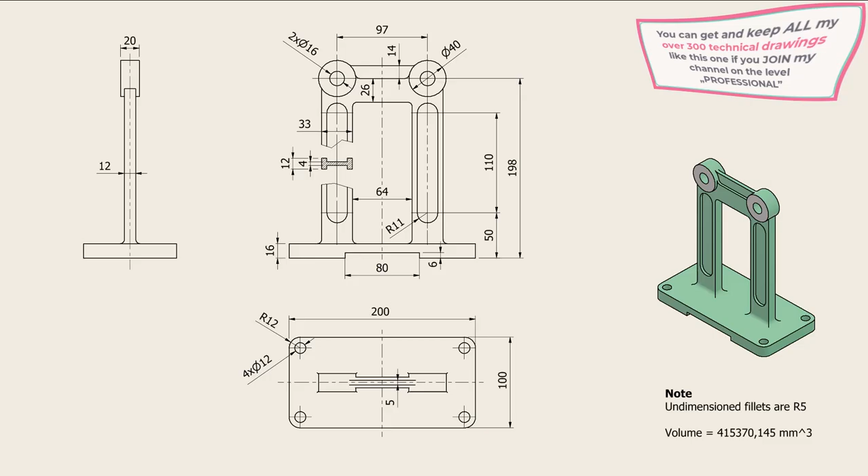Hi my friends, today we model this part, steel cast, with the drawing and dimensions as you can see. It is not a difficult model, so let's start with creating this base plate, then other features.

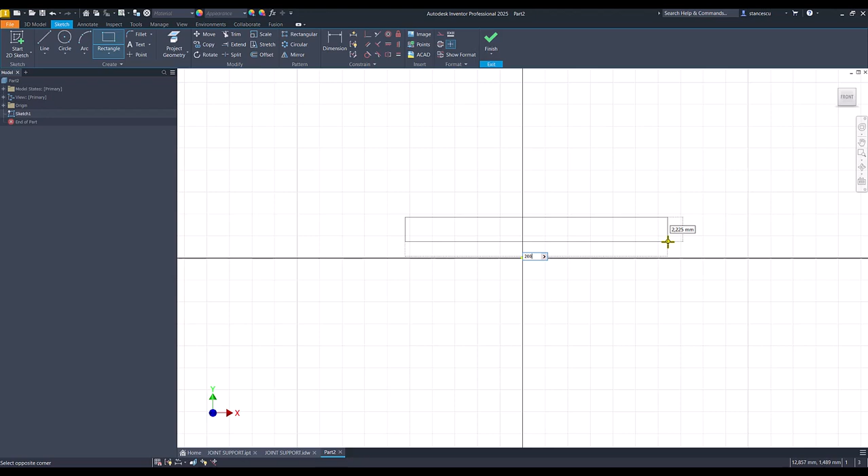New standard, millimeters, IPT. XY plane, and we draw a rectangle. Dimensions are 200 tab 16. This midpoint is placed on the center point.

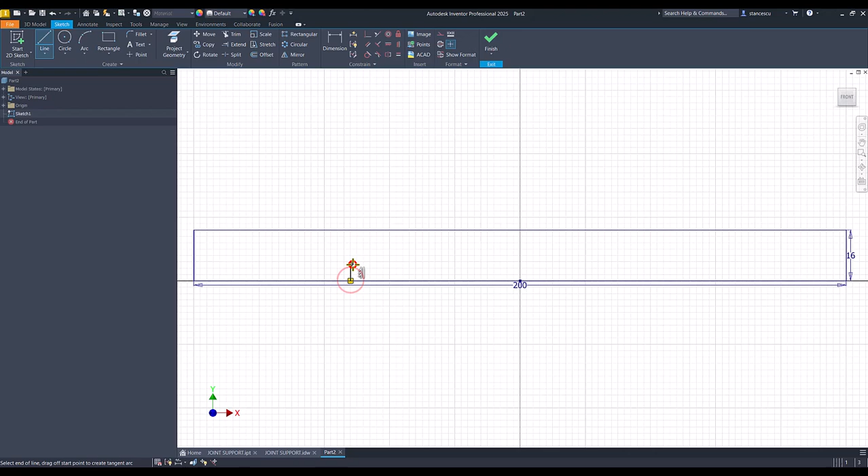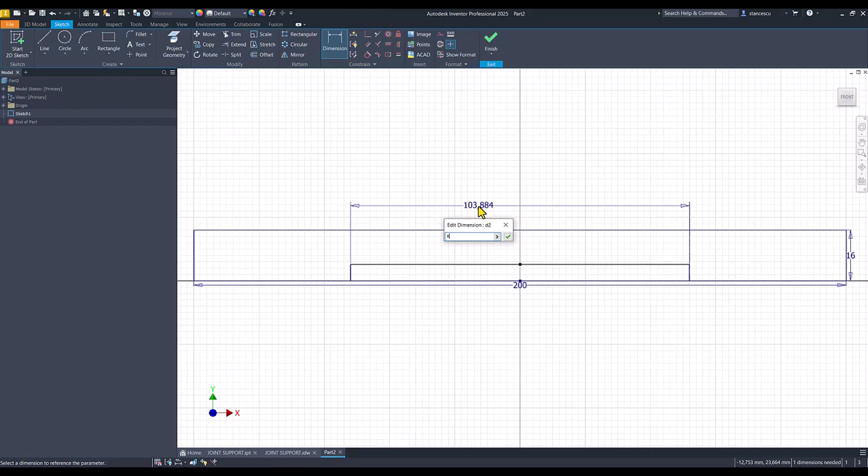Then I draw a few lines. This midpoint is on the same vertical with this, and the dimension is 80. Finish sketch, extrude.

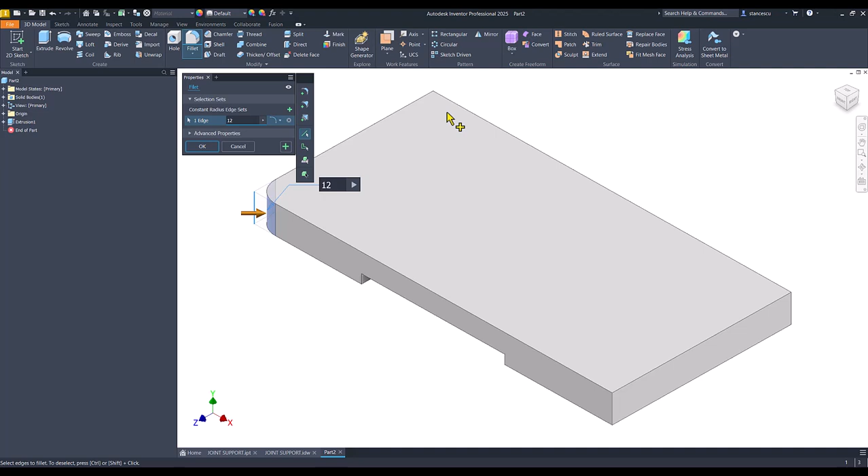This must be extruded symmetrical 100. Now I apply fillets of radius 12 on each corner.

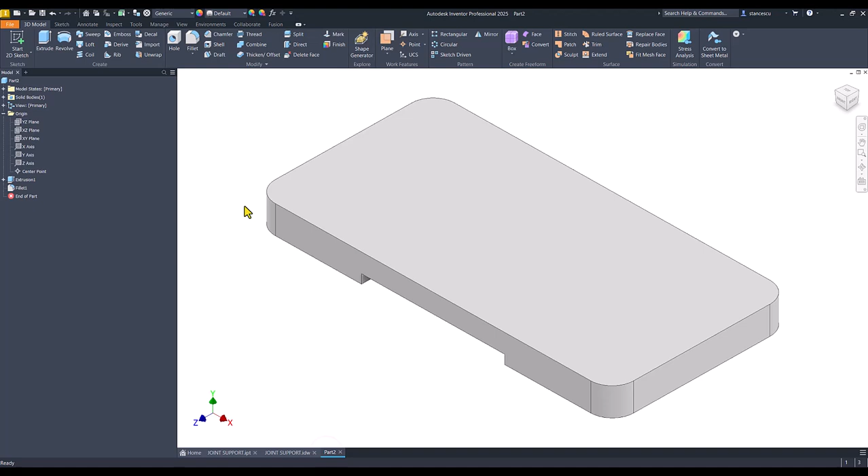Then we create this rectangle in rectangle with dimensions 198 minus 16, 33, 64, 26, in the plane XY.

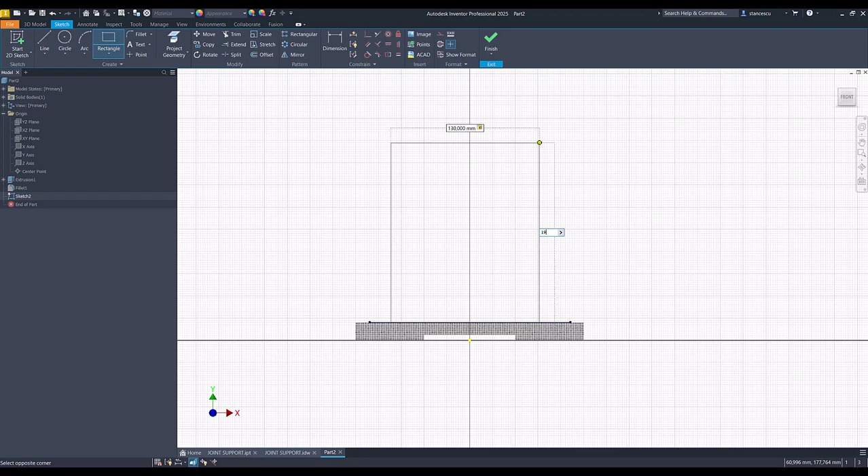F7, rectangle. This dimension is 64 plus twice 33, tab 198 minus 16.

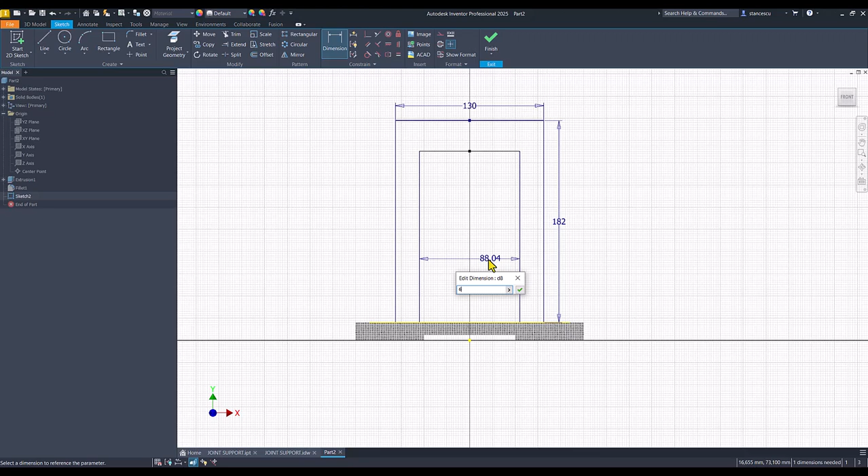The other rectangle is placed symmetrical, so I select this point to be aligned with this point, and this point to be aligned with this on vertical. This is 64, and this is 27.

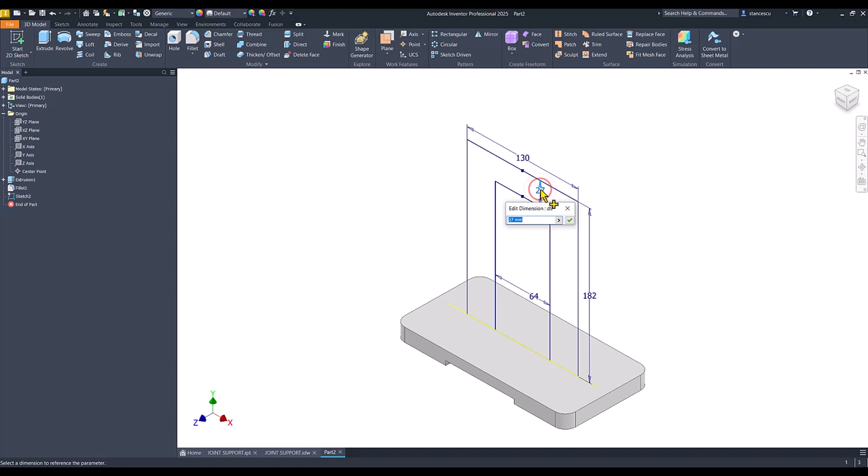Good. This frame is 12, thickness is 12. Oh, 26, not 27. 26, you see, I didn't open the sketch. This is a good lesson.

Extrude this symmetrical on 12.

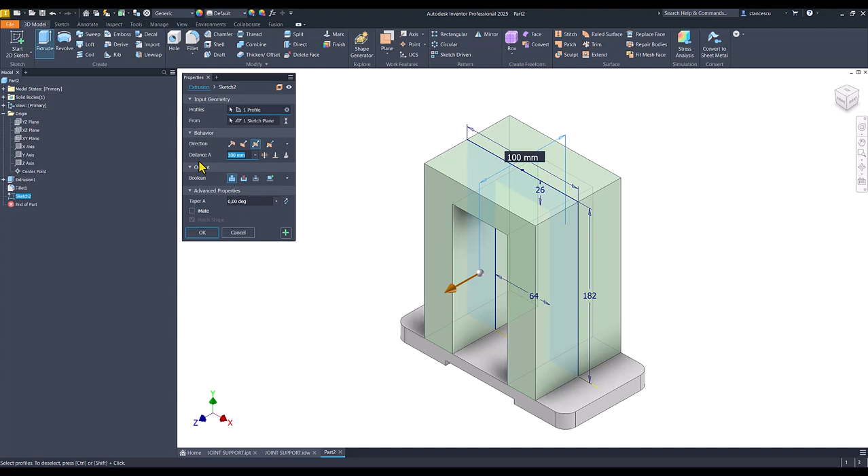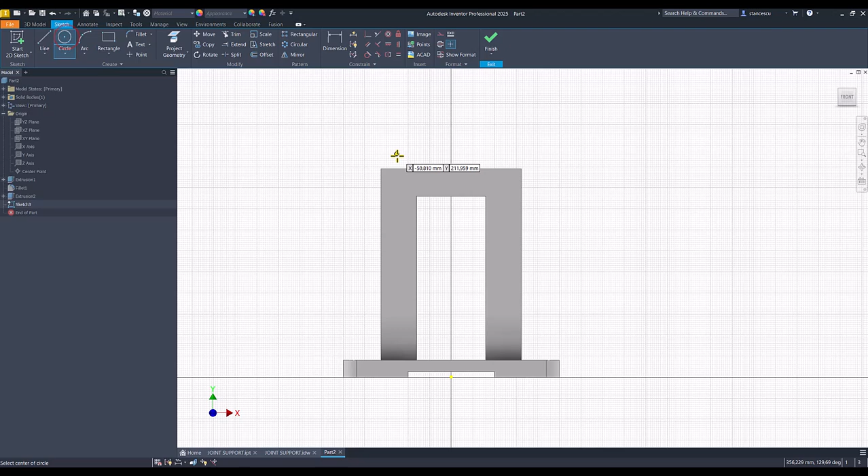Okay, we use again XY plane because we want to place these cylinders with dimensions 40, diameter 40, thickness of 20, distance of 97, placed on this horizontal. I create a circle placed here, diameter of 40, and distance from the center point of 97 divided by 2.

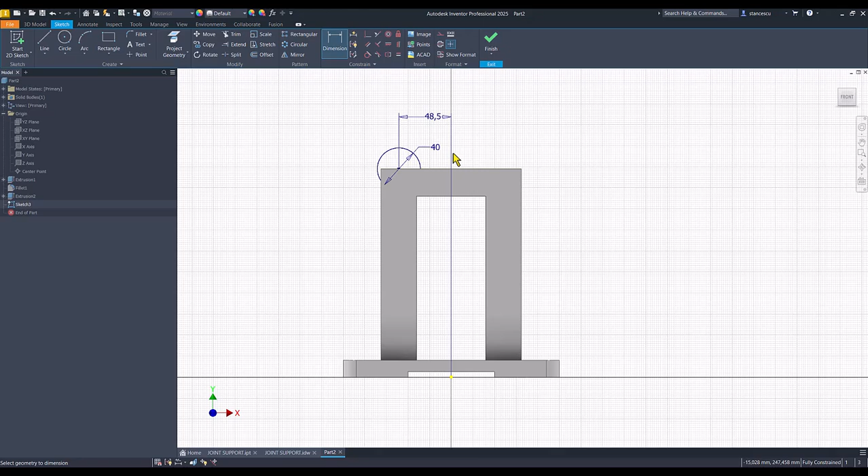Now we have a fully constrained sketch. Extrude, symmetrical on 20.

Okay, next is this slot. 110, placed at 50 millimeters from the base and radius 11.

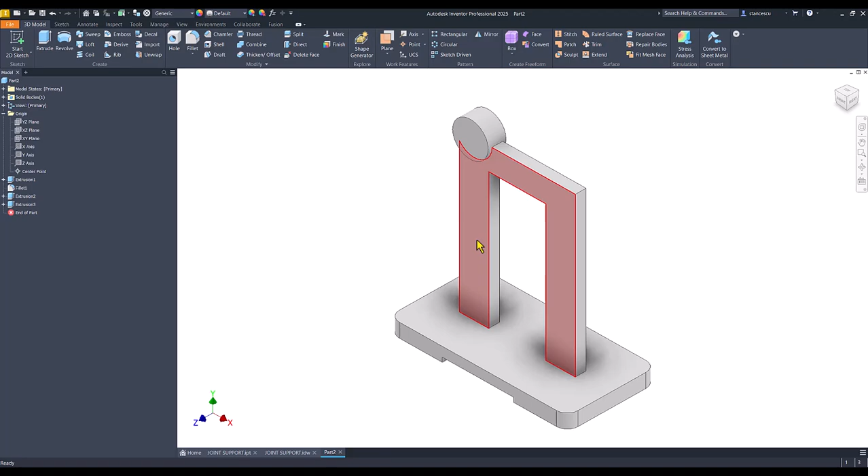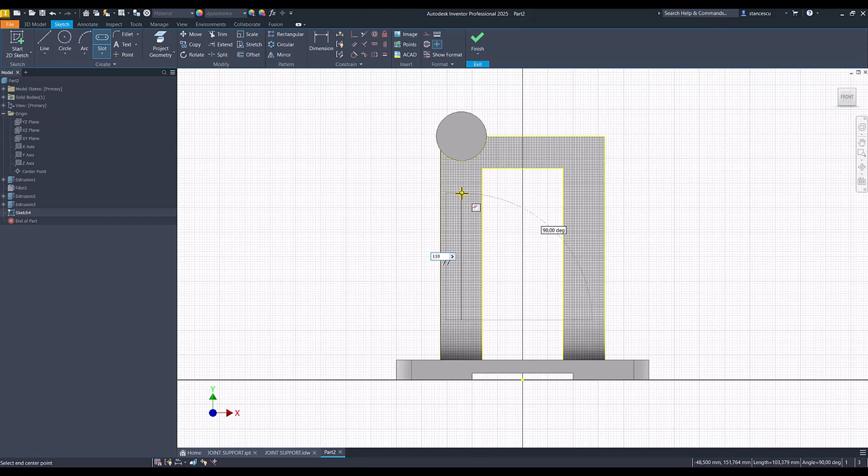I select this face and I go to rectangle, slot, not rectangle, center to center. Line of 110, then thickness of twice 11. This distance is 50.

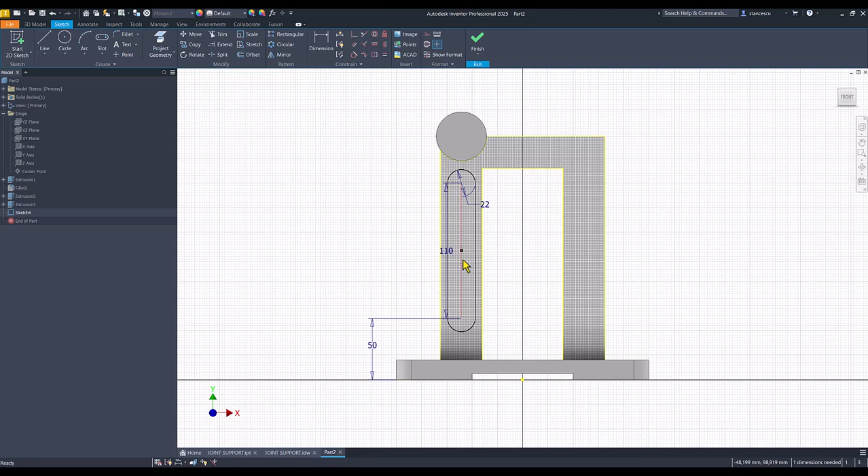Now we have to place this vertical somewhere in the middle. Take a look at my solution. F7, I draw a line from this corner to this corner.

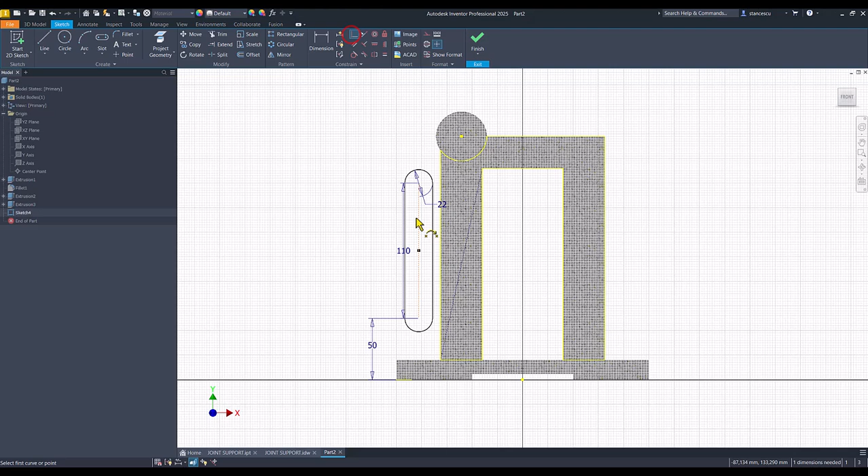I make this line construction and I place this vertical on the center of this diagonal. Okay, okay, good.

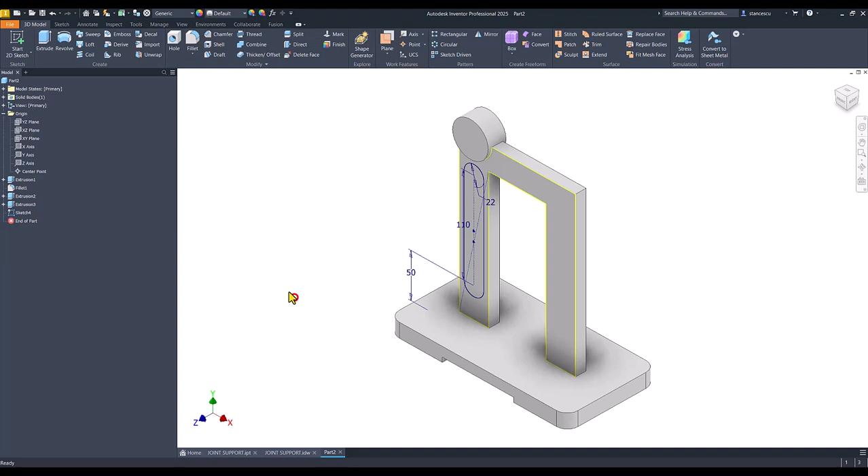Now, 12 minus 4 divided by 2 is the depth. Extrude this with cut, and the dimension is 12 minus twice of, or 4, twice 4.

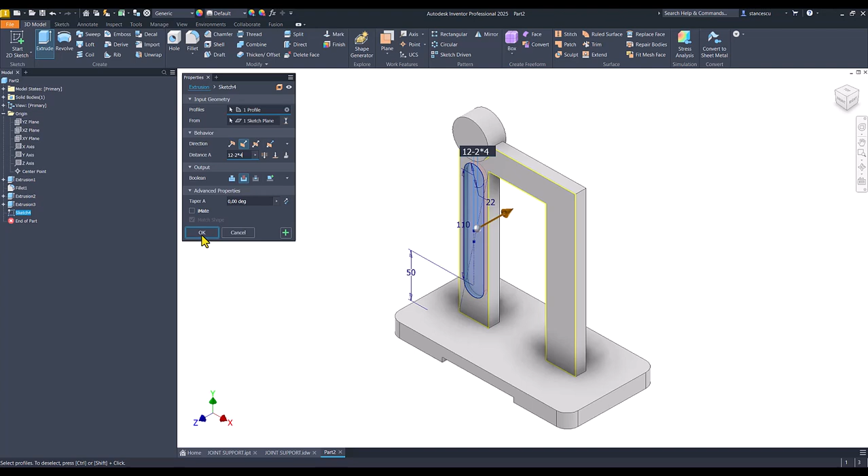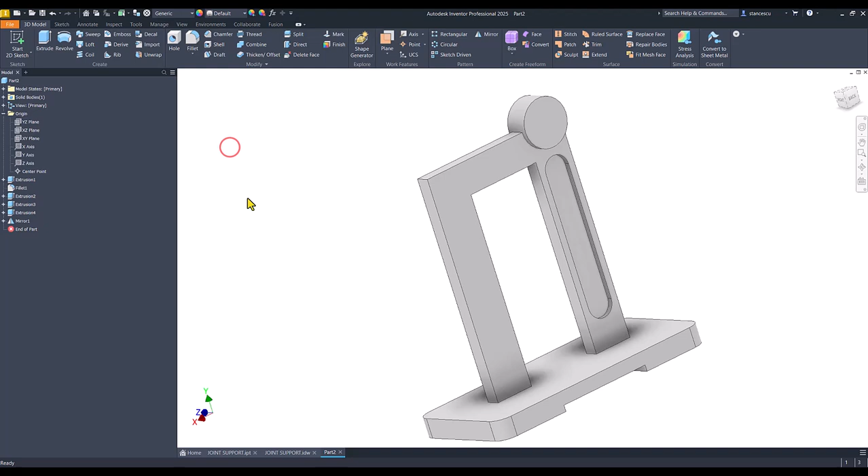Okay, I apply mirror for this last extrusion about the plane XY to create this cut. Then I mirror both the mirror and the cylinder about the other mid plane, which is this one.

Very good. Now we create this rib with dimensions 14, 97, and thickness of 5. This 97 is in the parameters table, so we can use it, as you will see.

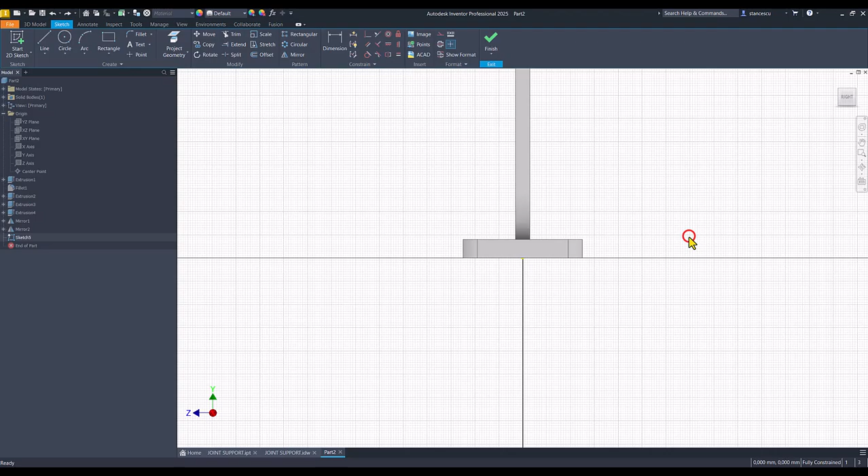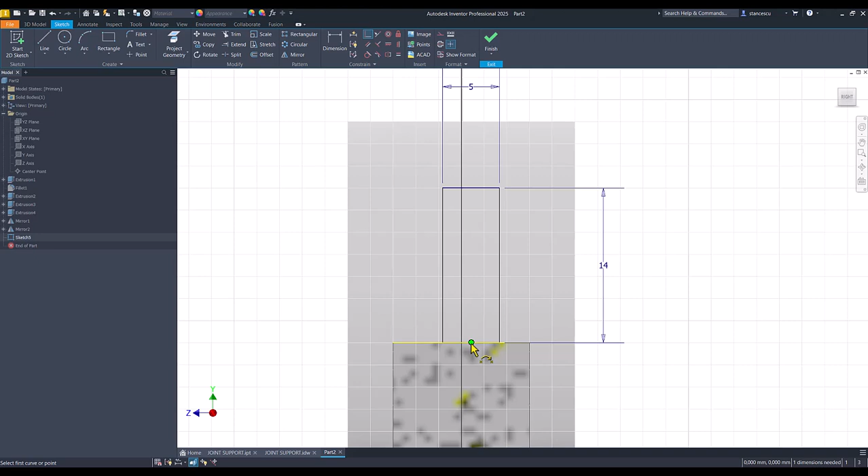The plane is this one, F7, a rectangle, tab 5, and we place it in the center. This center point coincident with this center point.

We have to extrude this symmetrical by using the dimension 97, but we can go to Manage, then to Parameters. We see 97 somewhere here, 97 divided by 2, D13.

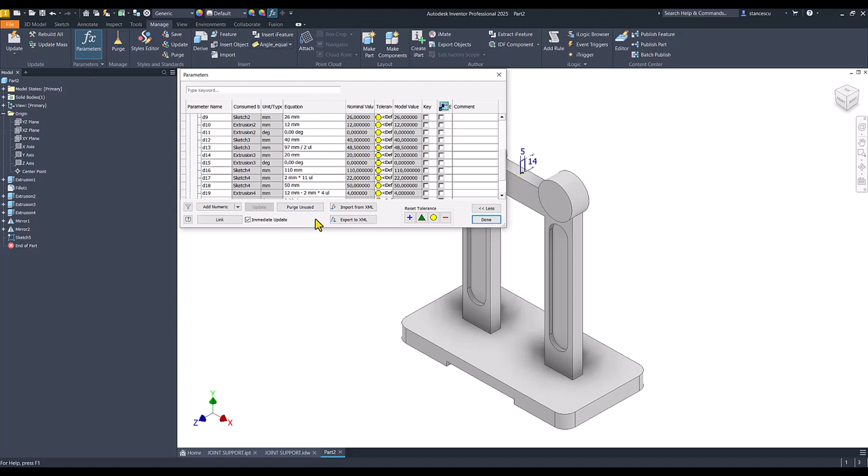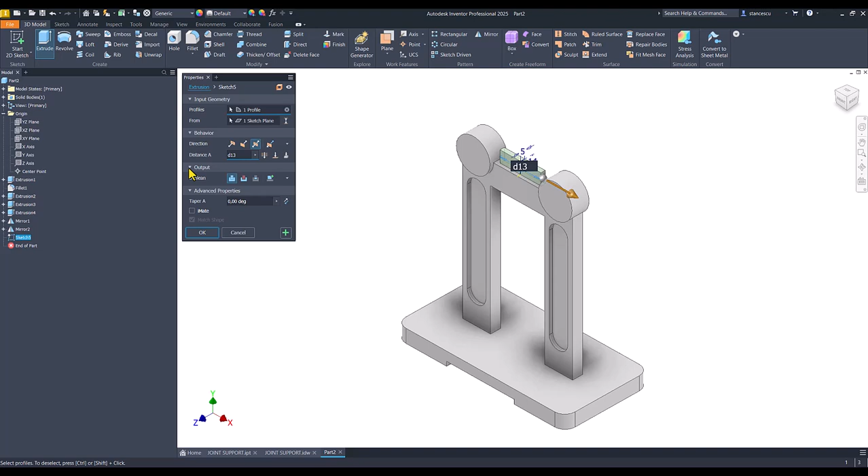So I make this extrude symmetrical, not 19 but D13 multiplied by 2.

Okay, why to do this? Because somebody can change the length, the distance between these two pillars, and have a wrong rib here.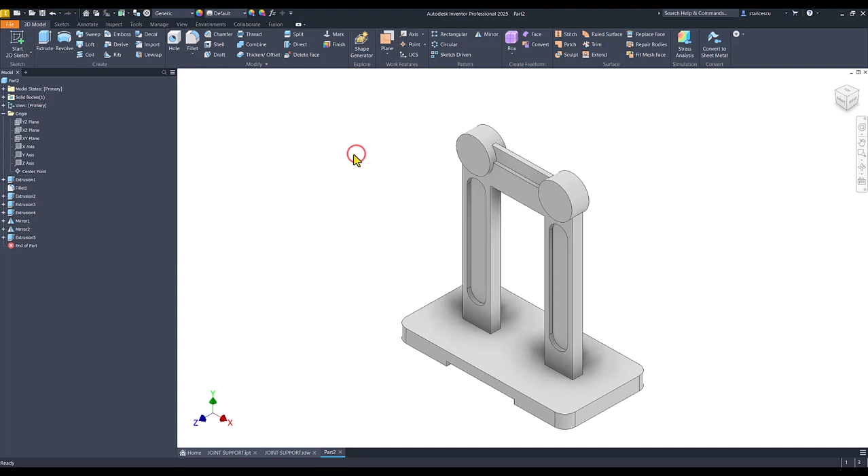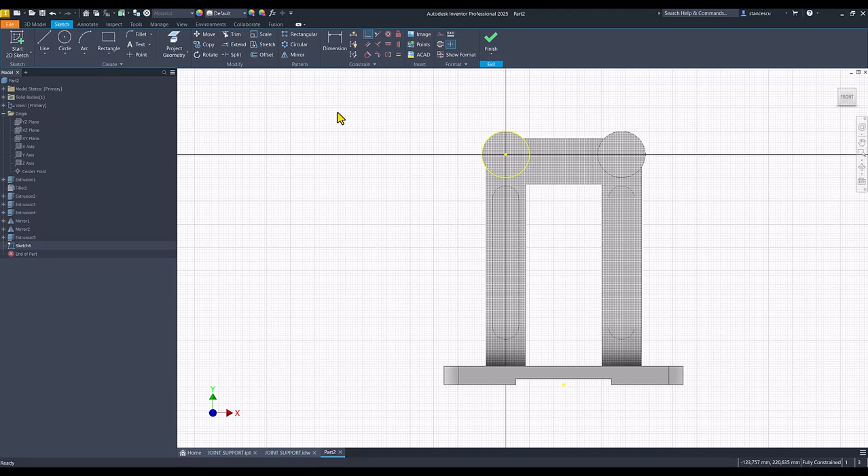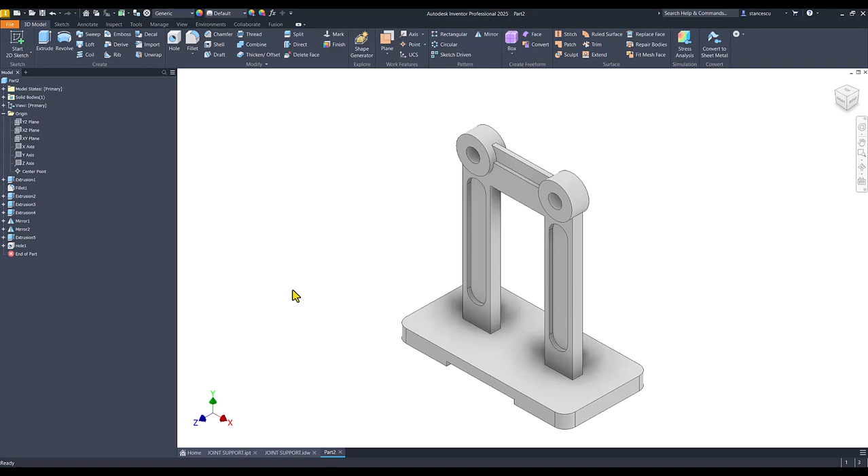Okay, now there are some holes, twice 16 and 4 times 12. I select this face. I also project the other face to have the centers. Hole, and these two centers with the diameter of 16, through.

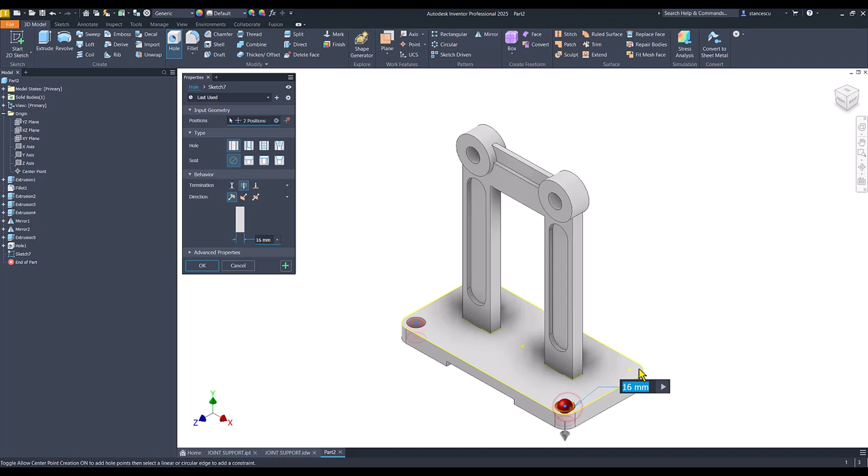Then we create a sketch to find the points, the centers, and we apply this hole in each of the 4 points. The dimension is 12.

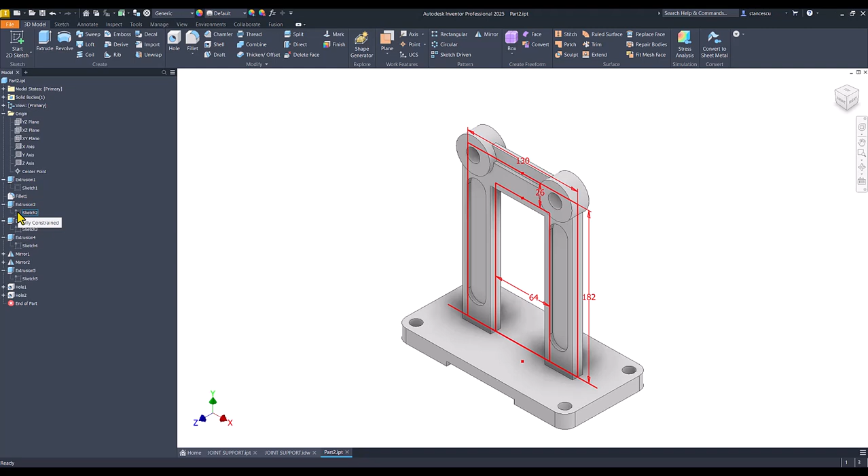Before applying the fillets, I want to verify the sketches. You see all these are fully constrained, but this one is not. Yes? Nothing is written here, but here is written fully constrained.

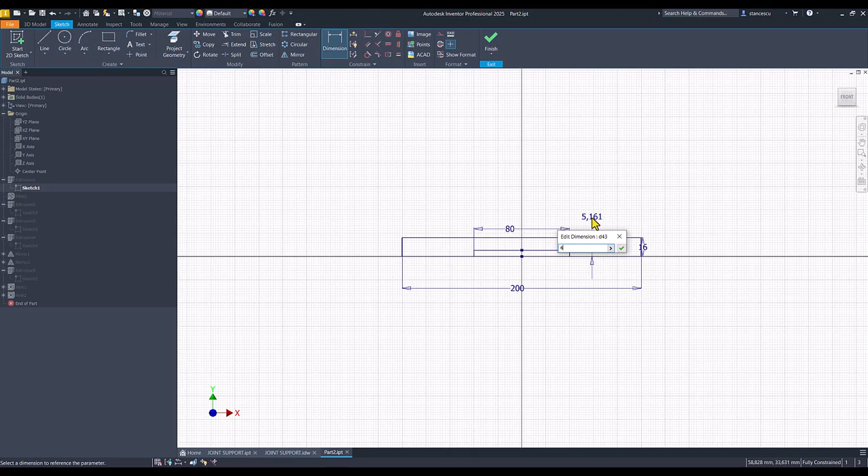So we have to see what is with this. Oh, there is not a dimension here. What is the dimension? 6. I forgot to place this dimension.

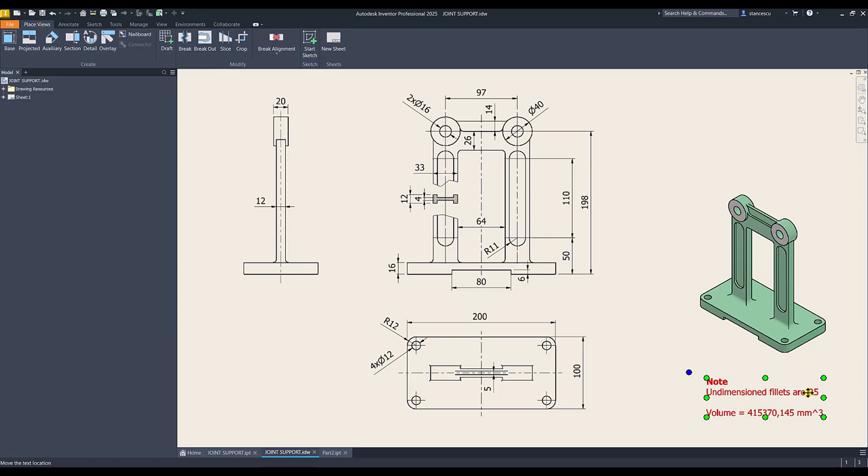Of course, I collapse all these and I apply fillet. You see, undimensioned fillets are radius 5. Let's apply this, five all over. It is in the drawing, of course.

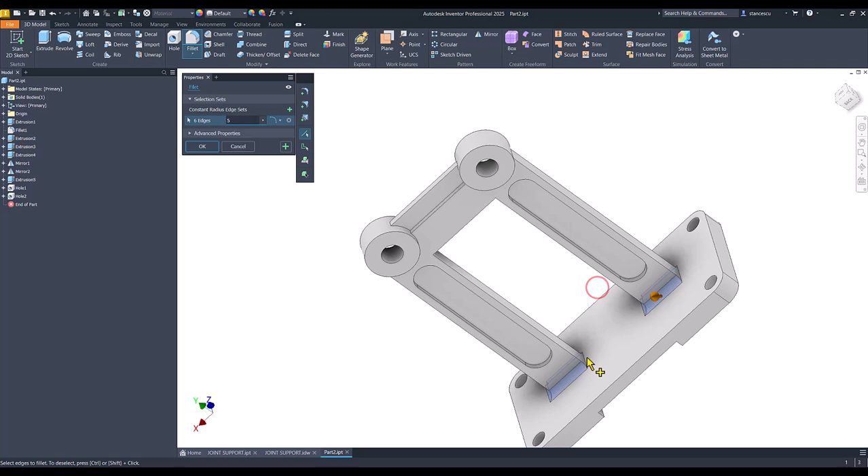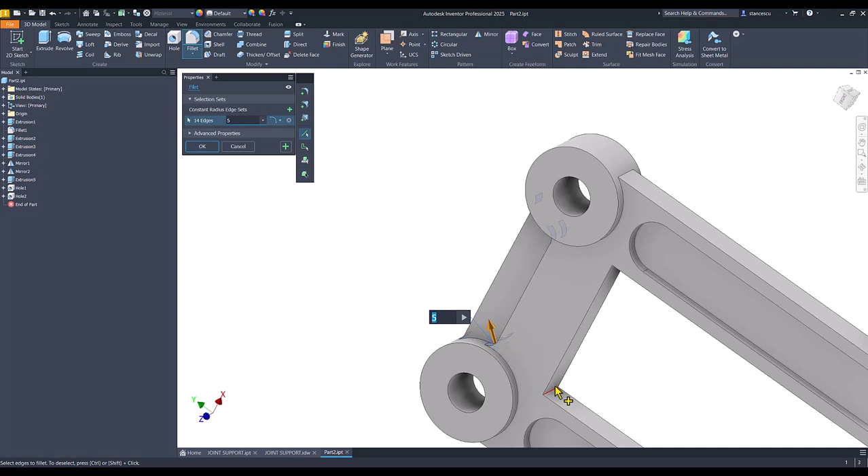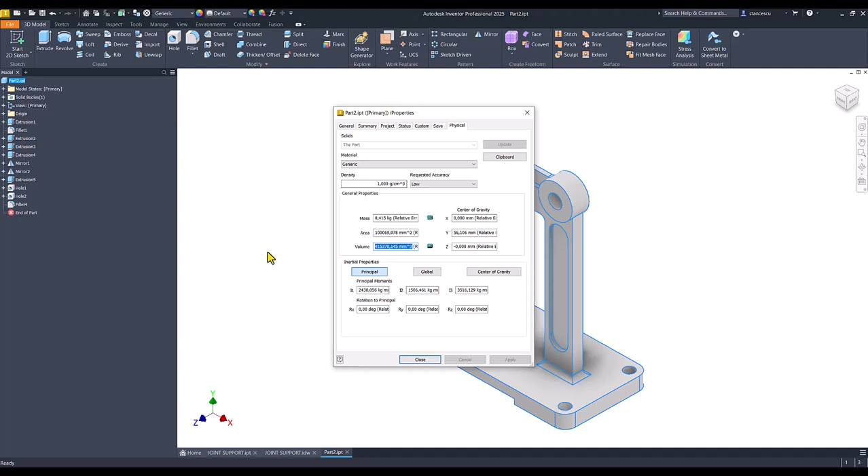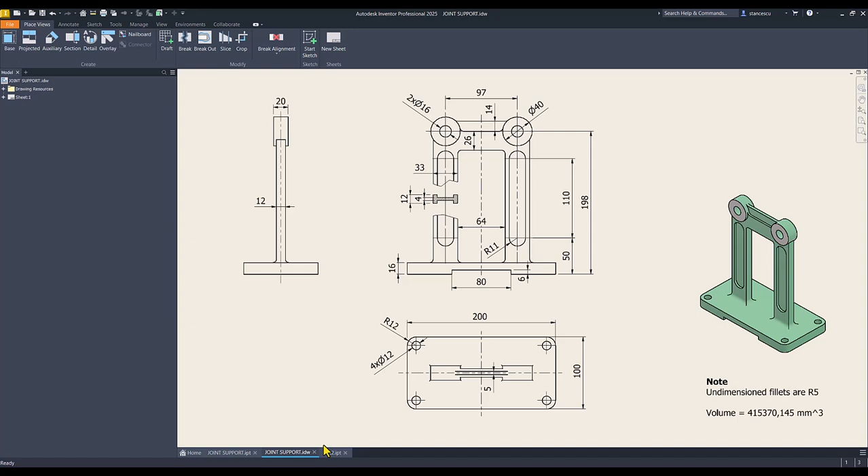And the last are these two. Okay, let's see what is the volume. Properties, physical, update, copy, close, drawing, double click, and the new value is just the same.

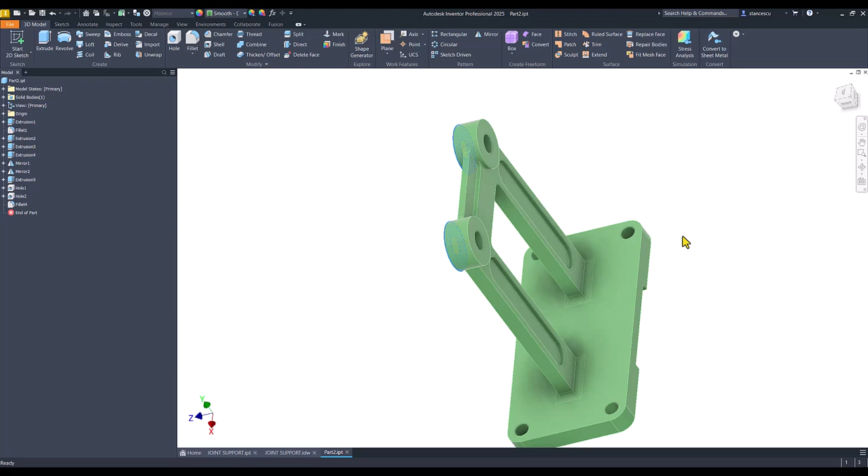I cancel changing this and I apply material, which is steel cast, and the aspect is this one, smooth dark forest green, and we select some faces to apply steel polished or machined faces. Steel polished.